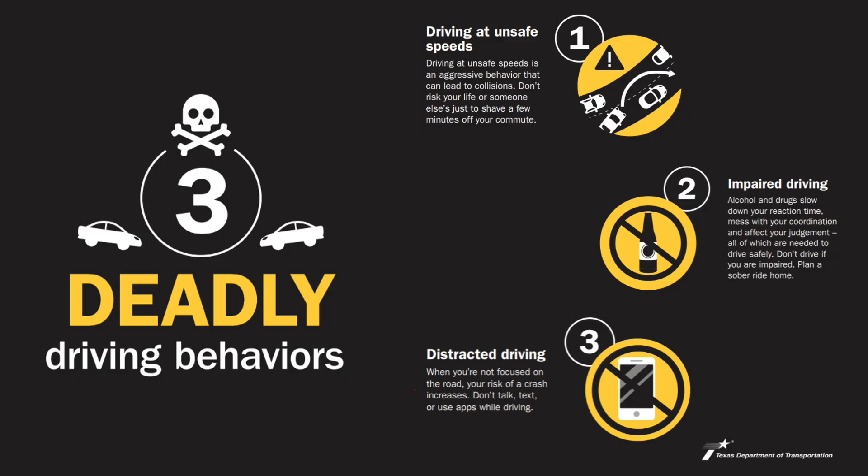This message is that reminder to end the streak of deaths on Texas highways. We need drivers and passengers to act more responsibly and help us reach our goal of 0 deaths by 2050. Texans can play a major role in ending fatal crashes with a few simple driving habits. Wear seatbelts, drive the speed limit, put away the phone and other distractions, and never drive under the influence of alcohol or drugs.

So please do your part and share this message with your friends and family to end the streak of daily deaths on Texas roadways.

The Loop 1604 North Expansion Project area spans about 23 miles in North Bexar County from State Highway 16, Bandera Road, to Interstate 35. Before construction, Loop 1604 North was typically 4 lanes wide with 2-lane frontage roads in each direction and a cloverleaf interchange where Loop 1604 crosses I-10.

Approximately 150,000 people drive on Loop 1604 daily, and that number is expected to double in the next 20 years. With the projected growth of the San Antonio area, future commute times across Loop 1604 could increase to almost 2 hours over the next 2 decades.

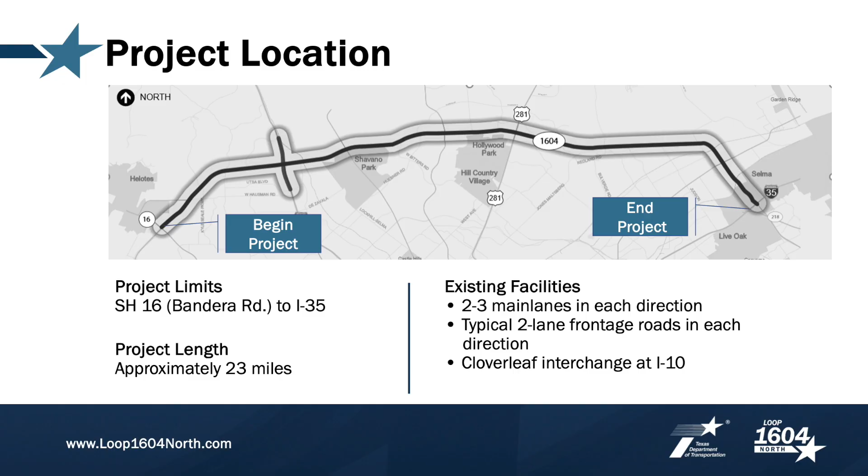TxDOT is investing $1.4 billion to increase connectivity and reduce congestion on the Loop 1604 corridor now and for the future. The Loop 1604 North Expansion Project is transforming the corridor with a 10-lane freeway, including HOV lanes in each direction, innovative intersection designs at the I-10 interchange and Blanco Road, and frontage road improvements that include accommodations for bicyclists and pedestrians. These investments will increase mobility on one of the most congested corridors in the state.

In fact, by 2045, it is estimated drivers could see travel times reduced by as much as 76% along Loop 1604.

The Loop 1604 North Expansion Project is divided into 6 segments, with segments 1 through 5 currently under construction. Segment 1 on the western end of the project, from State Highway 16, Bandera Road, to I-10, has an estimated construction cost of $148 million. This segment is currently 96% complete and is scheduled to be substantially complete by early 2026.

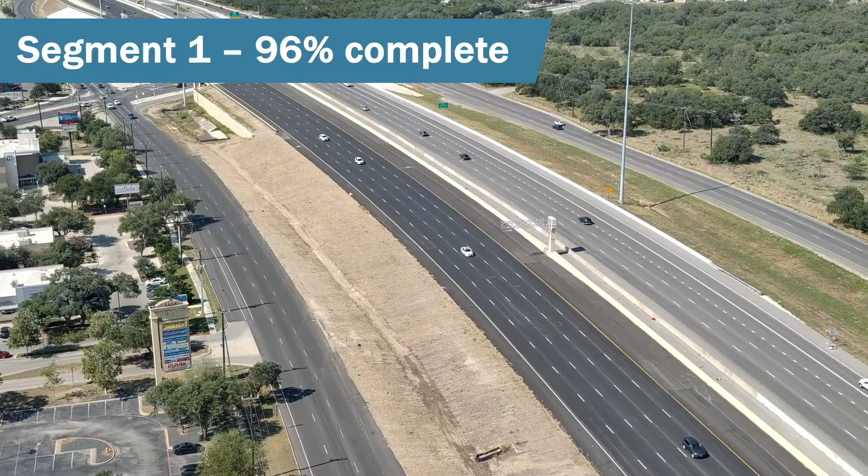Recently completed construction milestones on the Segment 1 portion include opening all main lanes and entrance and exit ramps to the final configuration. The contractor is working on the final asphalt surface on both the main lanes and frontage roads.

To wrap up construction on Segment 1, crews will be widening the frontage roads between La Cantera Parkway and Leon Creek. Final paving, including pavement markings and signage on the main lanes, frontage roads, and cross streets, as well as sidewalks and curbs, is expected to be completed by early 2026.

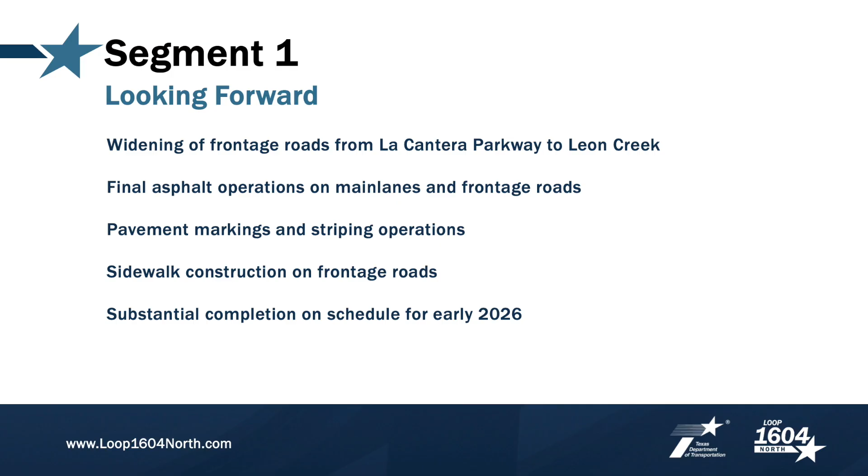Segment 2 focuses on the interchange of Loop 1604 and I-10 and has an estimated construction cost of $418 million. This segment is 68% complete and is anticipated to be fully open to traffic in 2027.

The major focus of this segment includes completing and opening the 8 flyover ramps connecting Loop 1604 with I-10. 5 of these flyover ramps have been opened and 2 more are expected to be opened by the end of 2025, leaving 1 flyover ramp remaining. The 2 flyovers expected to open next are from eastbound I-10 to both eastbound and westbound Loop 1604.

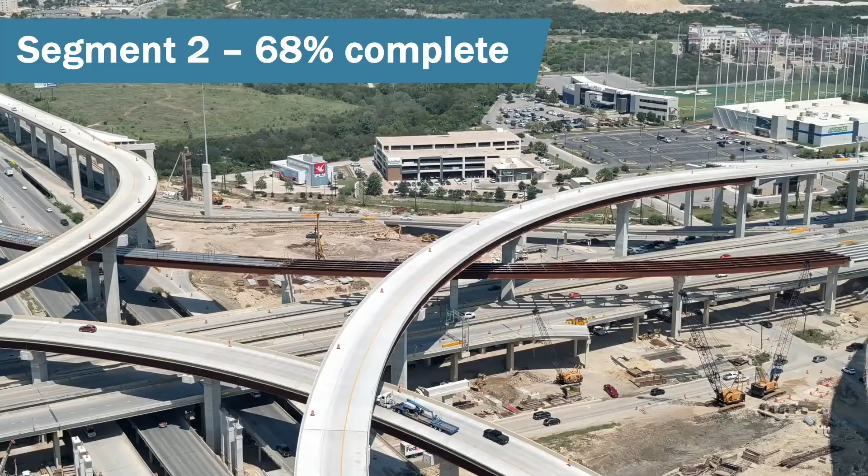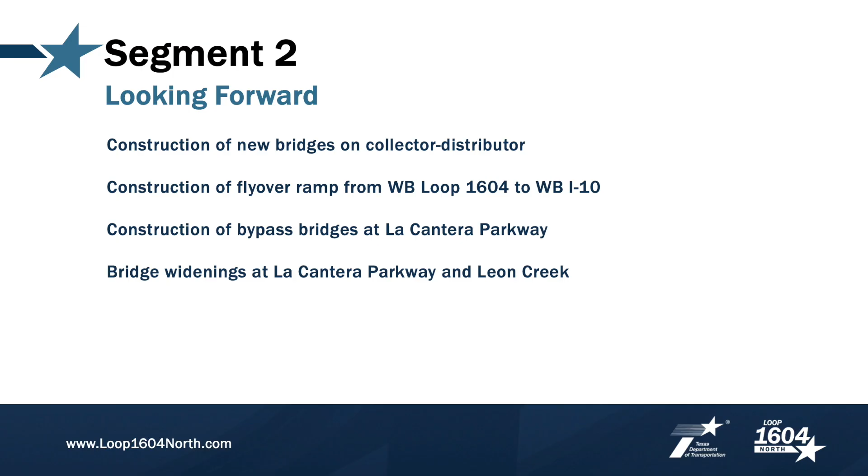Drivers can expect to see construction of new bridges for collector-distributor lanes on both Loop 1604 and I-10, and the construction of the flyover ramp from westbound Loop 1604 to westbound I-10. The bypass bridge at La Cantera Parkway, coming from the eastbound Loop 1604 to westbound I-10 direct connector, is expected to open in spring 2026. The contractor is also currently working on bridge widening at La Cantera Parkway and Leon Creek, north of the Loop 1604 interchange.

Up next, Segment 3 of Loop 1604 spans from the I-10 interchange to just east of US 281 and has an estimated construction cost of $244 million. This segment is 90% complete and is anticipated to be completed in mid-2026.

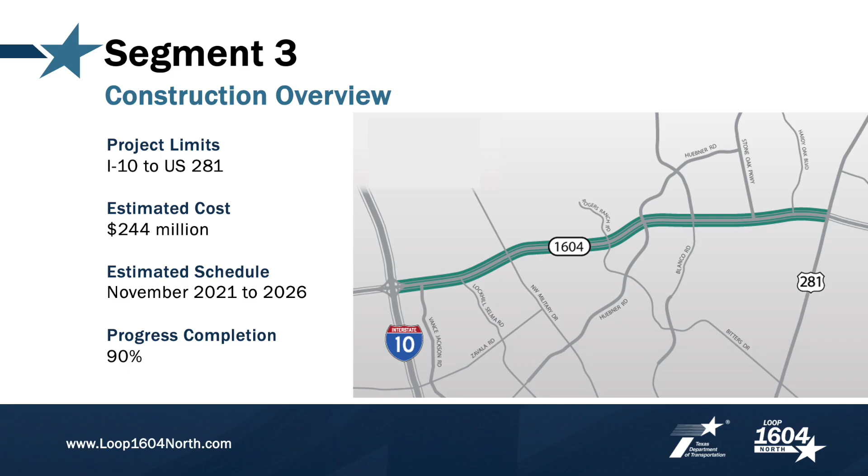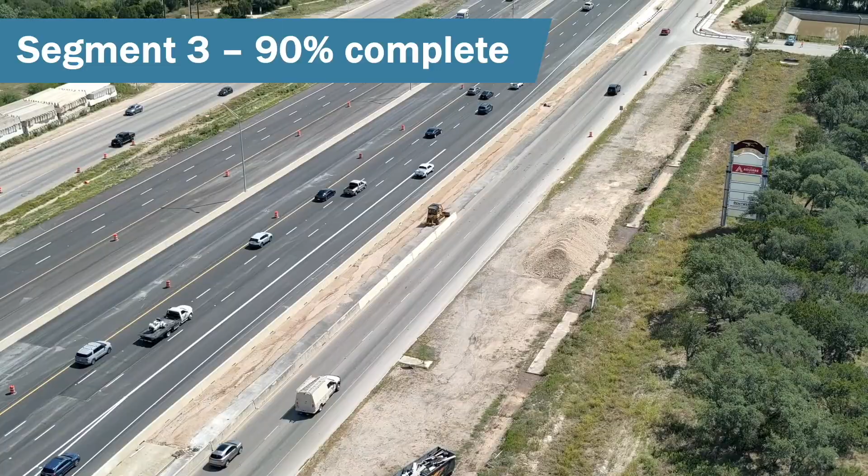Recent construction milestones for Segment 3 include the final configuration of the main lanes to just west of Blanco Road and the ramps between Blanco Road and I-10. Final ramps between Blanco Road and Stone Oak Parkway are progressing.

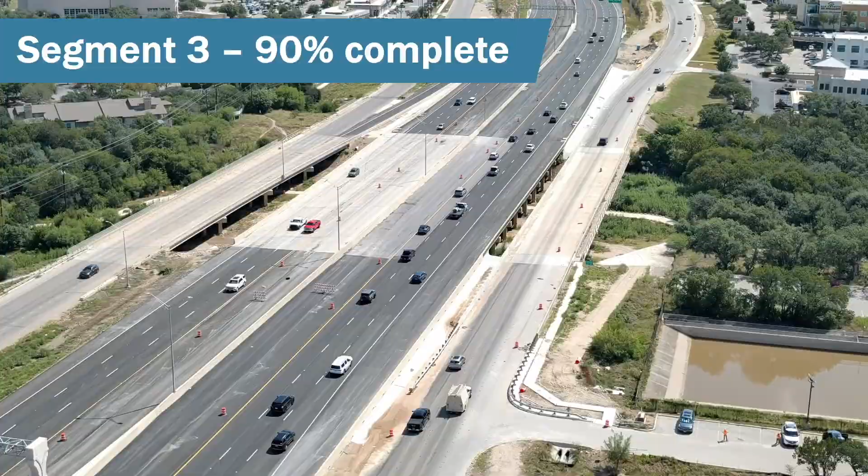Drivers can look forward to final paving on the main lanes as well as the Blanco Road conversion to a diverging diamond intersection with 2 turnaround bridges. There will also be road widening at Blanco Road to accommodate the new diverging diamond intersection and the installation of sidewalks at Blanco Road.

In addition, sidewalks are also being constructed along the frontage roads in this area in Segment 3. Collector-distributor lanes will be opening from Huebner Road and Stone Oak Parkway to bypass the Blanco Road intersection in the near future.

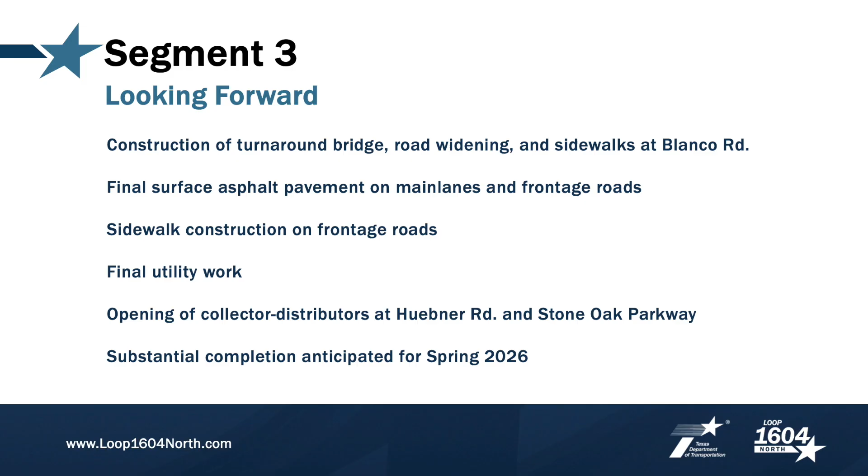Segment 4 is located from US 281 to Redland Road and has an estimated construction cost of $193 million. This segment is 33% complete and is on schedule to be completed in late 2027.

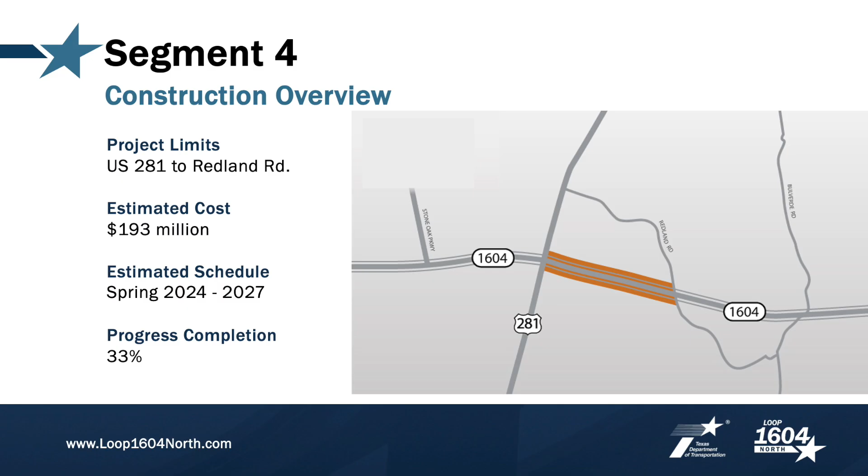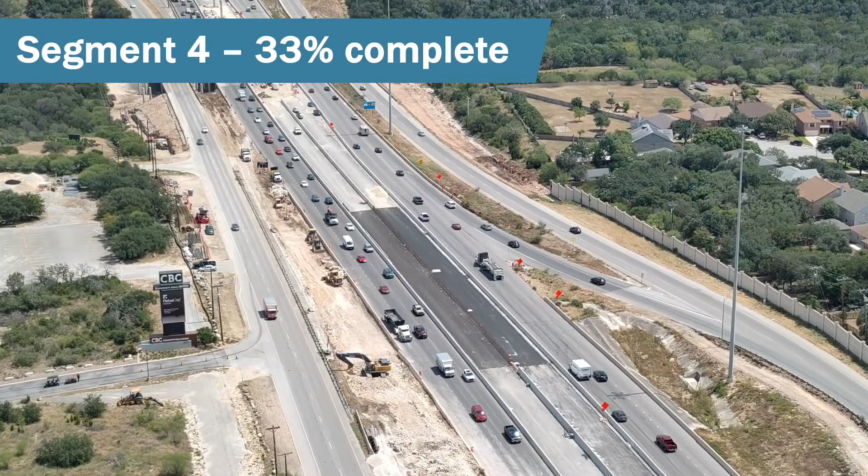Recently completed construction milestones in this segment include completion of the work on interior main lanes. Traffic has shifted to these newly constructed main lanes in both directions, except at Mud Creek, where the contractor is completing some bridge work.

Drivers can expect to see crews working on the construction of turnaround bridges at Gold Canyon Road and Redland Road, in addition to bridge widening work at the US 281 interchange with Loop 1604.

The contractor is working on exterior widening of the main lanes at Stone Oak Parkway and constructing retaining walls throughout the segment. Drivers can expect a traffic switch near Gold Canyon Road and Mud Creek to bring traffic into the next phase of configuration.

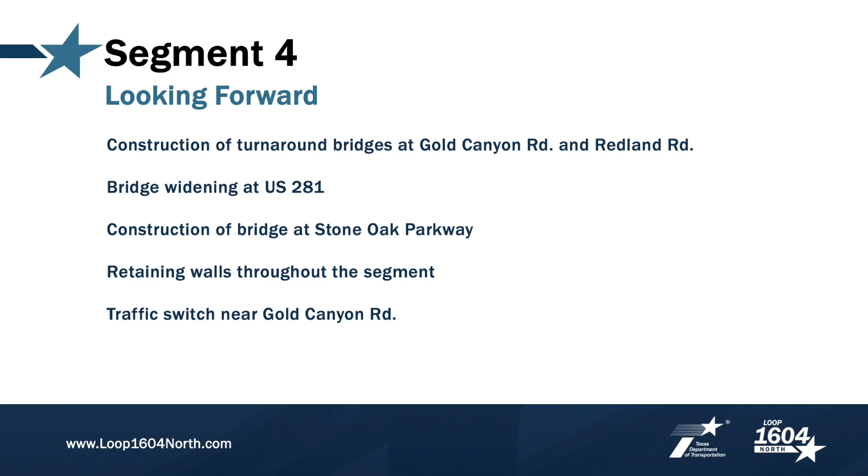The final segment currently under construction is Segment 5, which includes Loop 1604 from Redland Road to Judson Road. It has an estimated construction cost of $184 million. This segment is 25% complete and is on schedule to be completed in 2028.

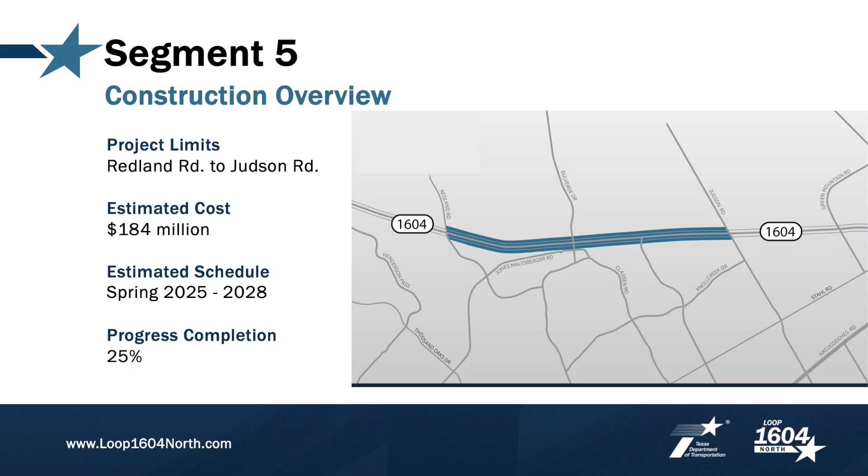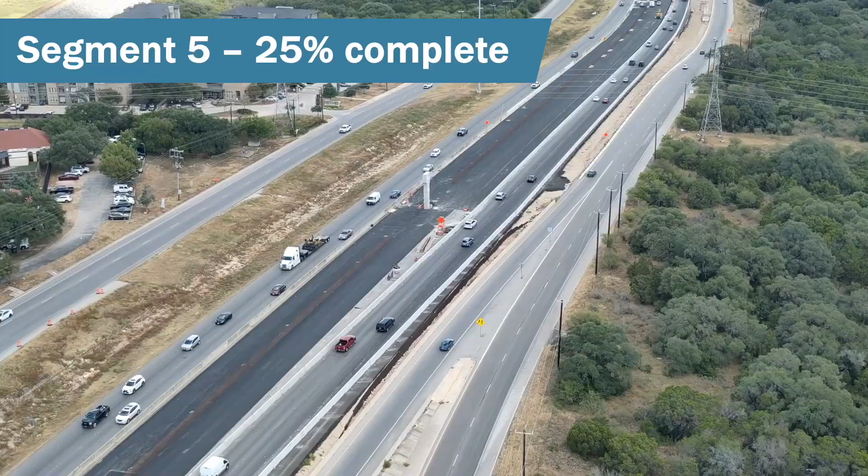Recently, the contractor has added pavement for future traffic switches on the main lanes and has performed bridge substructure work and started building retaining walls throughout Segment 5.

Drivers can expect to see work on bridges at Bulverde Road, O'Connor Road, and Judson Road, as well as work continuing on the retaining walls in these areas. U-turns will also be constructed at O'Connor Road and Judson Road.

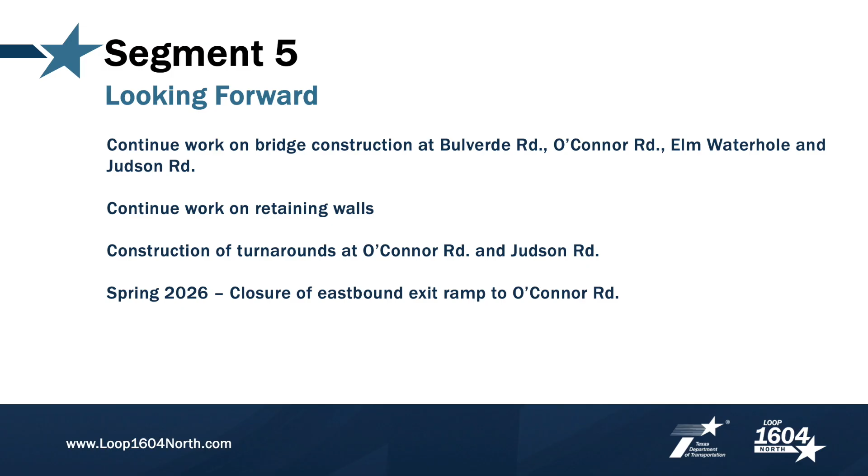Drivers can expect a closure of the eastbound 1604 exit ramp to O'Connor Road in early 2026 to prepare for a ramp reversal.

In summary, 2025 has been a year of big accomplishments on the Loop 1604 North Expansion project. Of course, depending on weather, the traveling public will see substantial completion of Segment 1 by early 2026.

2 more flyover ramps between Loop 1604 and I-10 will also open on Segment 2 in 2025. The completion of these 2 flyover ramps will mean that 7 of the total 8 flyover ramps will be open to traffic. On Segment 3, preparation continues on the diverging diamond interchange at Blanco Road.

TxDOT intends to develop materials and roll out an educational campaign for travelers on how to navigate this newer, innovative type of intersection prior to opening. Be on the lookout for that information.

Segment 4 is progressing with main lane widening and bridge widening at the US 281 interchange, and Segment 5 is preparing for traffic switches in the near future.

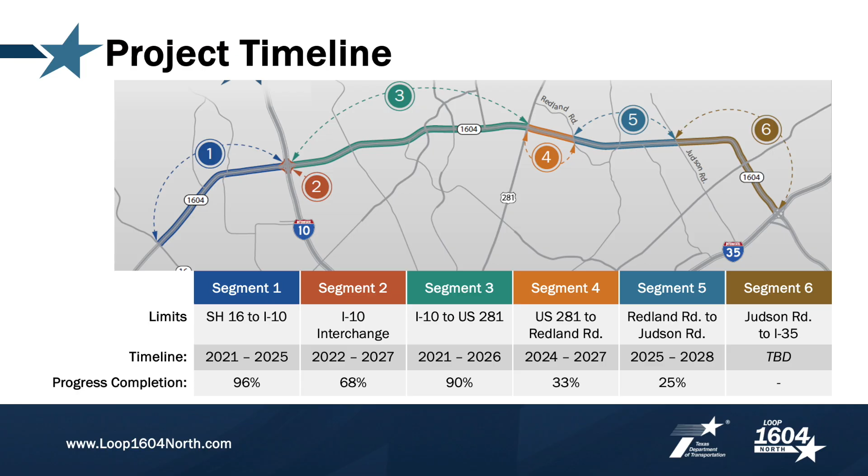The final segment of the Loop 1604 North Expansion Project, Segment 6, which ties Loop 1604 to I-35 and completes the corridor, is pending a final timeline and construction has not yet begun.

TxDOT will provide relief to drivers during the holiday season, specifically during the week of Thanksgiving and the last couple weeks of 2025. There are no planned closures from November 26th through the 30th, and again from December 19th through January the 4th.

There will be nightly closures from December 8th through the 18th, with adjusted hours from 11 p.m. until 5 a.m. Standard closures will resume on January the 5th, 2026.